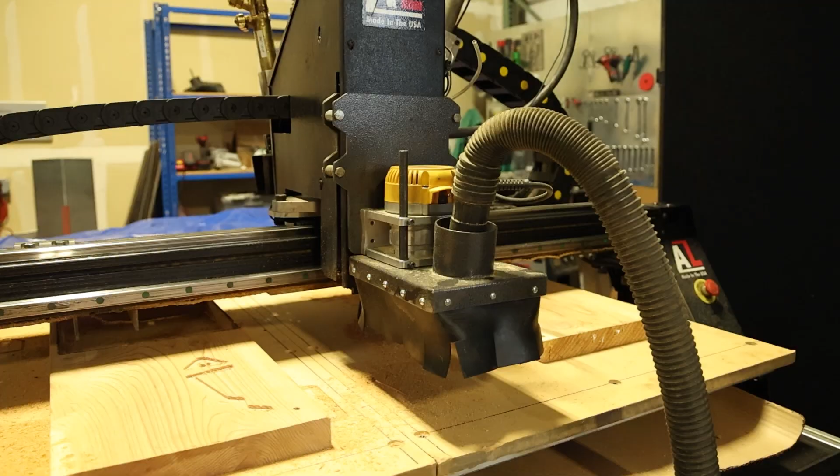Hey, I'm Dakota with the Arclight Dynamics tech team, and today I'm going to show you how to use the router on the Flashcut CNC control system.

When you get your router kit, there's a few things you're going to need to do to set that up. The first thing you're going to need to do is pull off the torch mount, and you're going to need to put on the router mount.

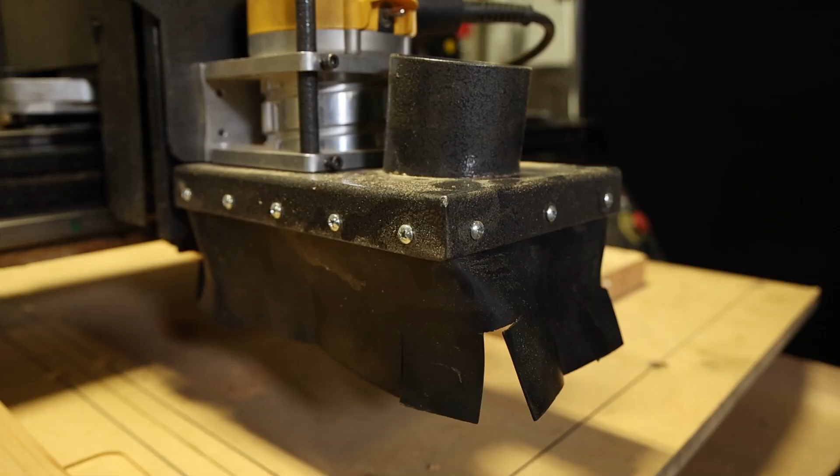Then you'll slide on your shroud to be able to get that over and contain the dust and shavings from the routing operation. We'll also need to set up our sacrificial plane on our router support bars, and our router support bars will sit on these towers here.

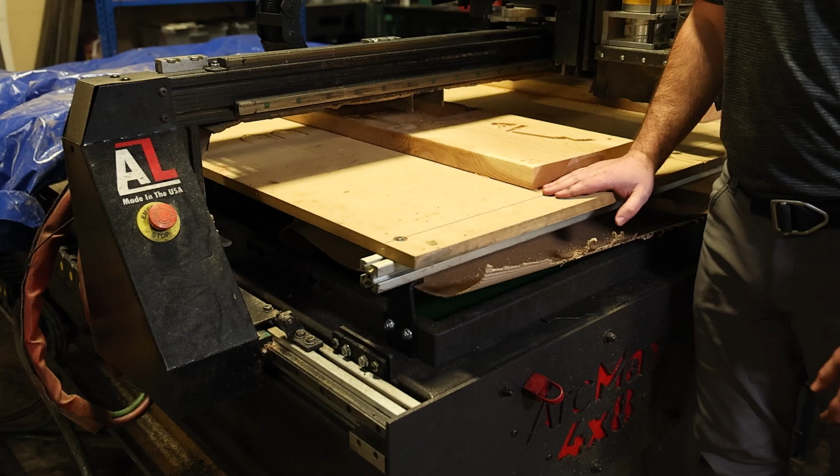From here, you can screw your plate, or whatever you're routing, in this case wood, onto your sacrificial plane. I also have some cardboard set inside the bottom of the pan here to make sure I can catch all that dust and debris that we're getting from routing. That way it doesn't go into the water when we decide to go back to plasma cutting.

We're going to start by going into Flashcut 10. Once we're in Flashcut 10, we're going to go to CNC. We're going to connect the controller. And after we got the controller connected, we're going to home the table.

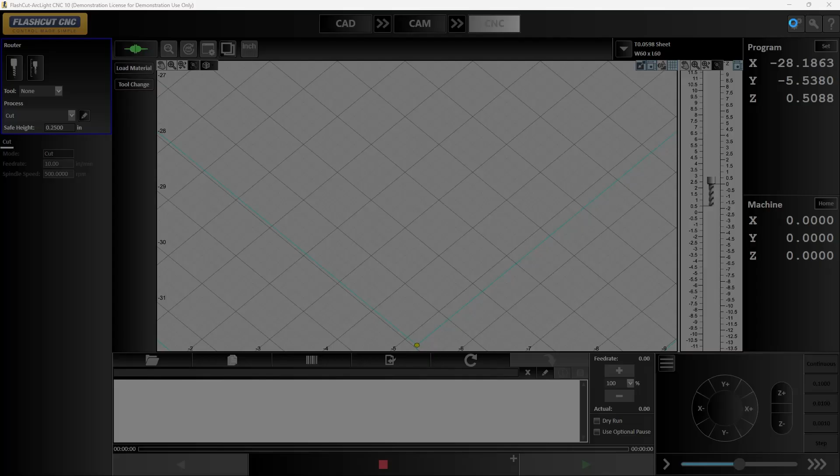We'll also want to set up our setup file. So we'll need to go to the configuration icon, hit load, and select our router setup file.

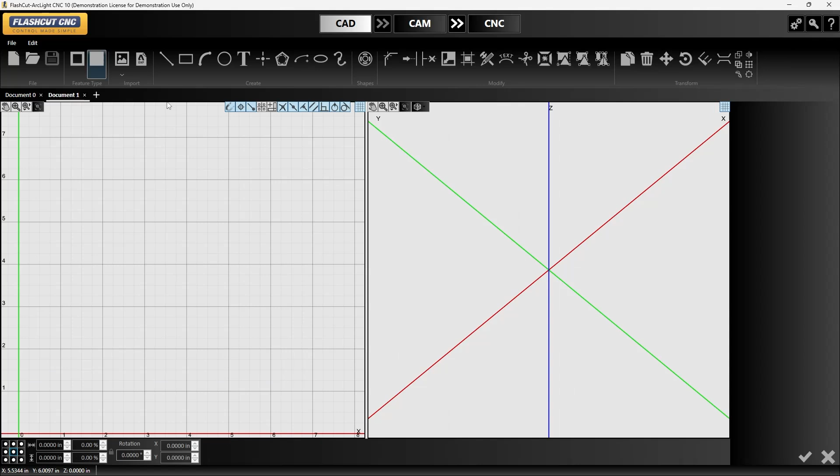From here we can go into CAD. In CAD, we'll go to File, New, and this is going to be a 3D part. Then from here, we'll bring in an Arclight shield, and we'll turn that image into a vector.

So we'll import a silhouette, find our Arclight shield. We'll start tracing a toolpath, or a vector, on this particular drawing. We can approve that.

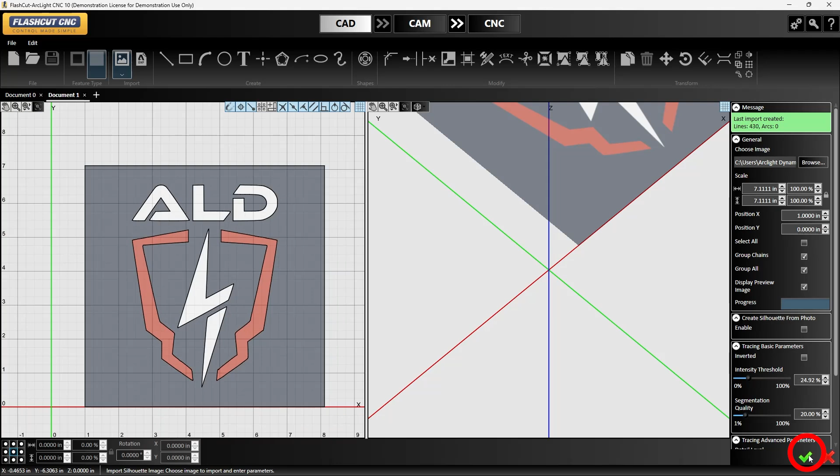Then we'll see the 3D dimensions for this drawing. Now for here, I want the outside to be the thickness of the material that I'm routing. So I have 1.5 inch wood on here right now. I'm going to set this just slightly thicker than 1.5 inch. That way when I go to route this, I get through the material all the way. So instead of saying 1.5 inch, I'm going to say 1.6 inches.

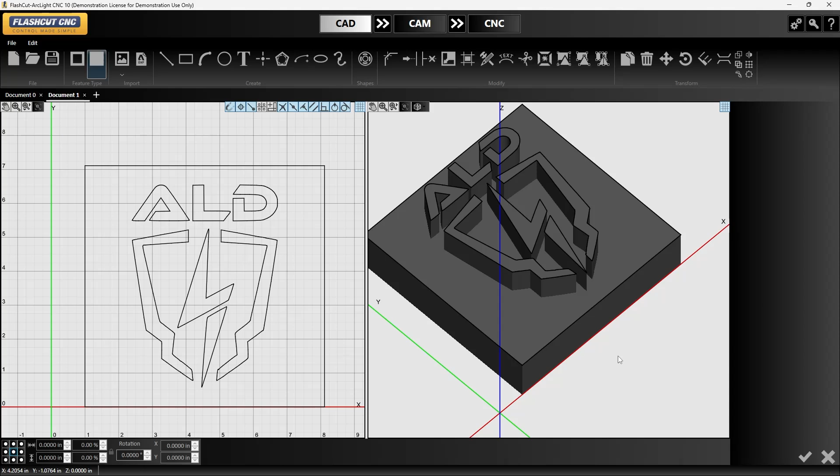This takes the whole drawing and moves this up. So now I need to take the inside of the drawing and move it down because I want to inset that into this part. I can hold Control and do multiple selection.

Then I can tell it the offset for this interior routing part. And I want this to be 1/2 inch into the material. So we'll go -0.5. Now we can see that that's inset in there.

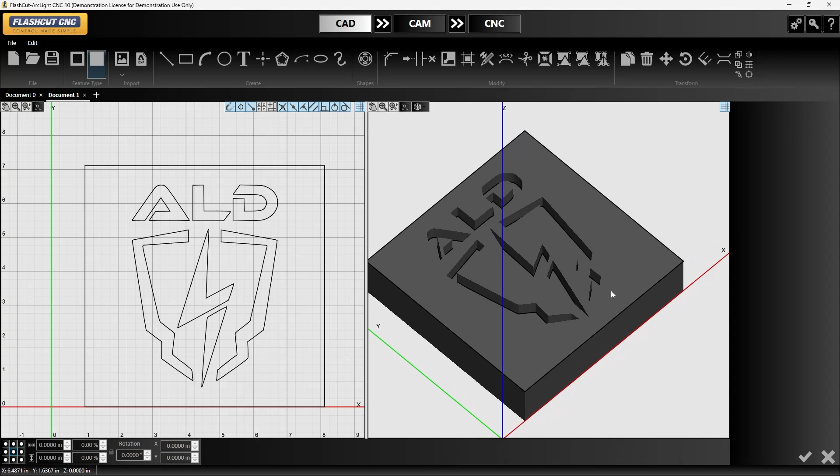And I'm happy with this operation so far, so I can send this over into CAM to start telling it how it's going to route this operation.

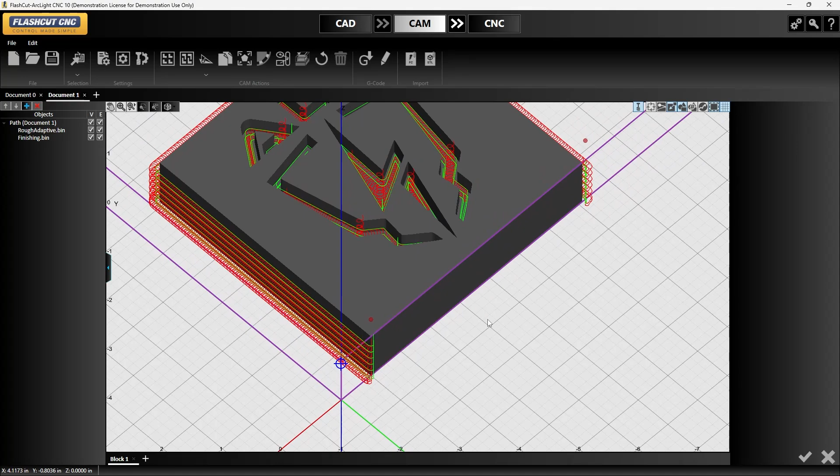So for getting this set up, it's going to immediately start throwing a toolpath on there based off of whatever settings we have already loaded in, but we'll need to go in and fine tune this.

So we'll go to the project settings first, and we'll set our default cutting fab head as the router. We'll approve that. Then we'll go into the material settings, and we need to set this based off of the area we're working in. So we want to make sure our project fits within this area.

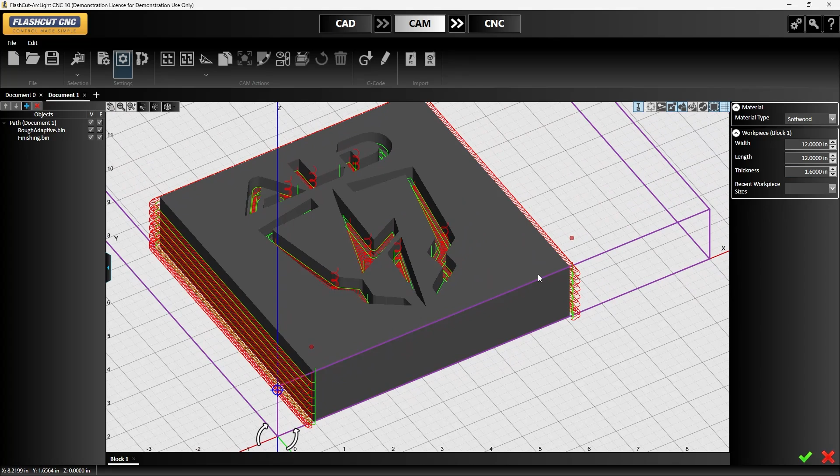So I'm going to set this up because this is a 7x7 part. I'm going to set this up in a 12x12 area, and the thickness being 1.6 inches, since that's what I've set for the material for this job as well.

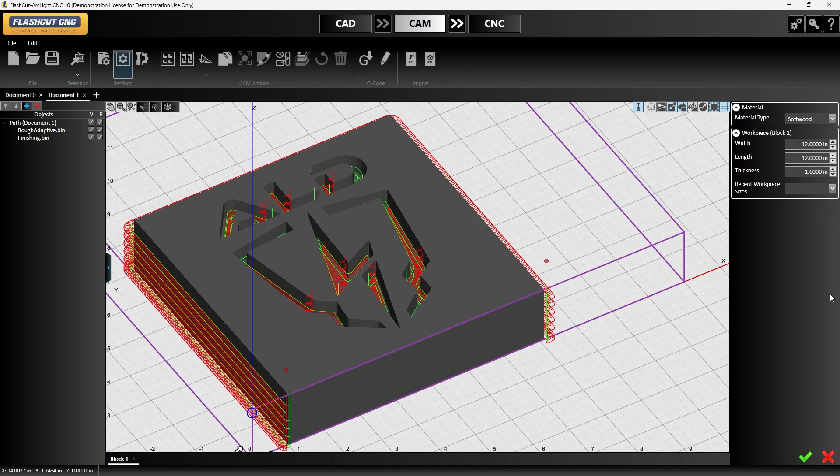Now I need to start setting up my toolpath for this operation. So on the left side here under Objects, we're going to see our operations here. And we can start going in and kind of fine-tuning this.

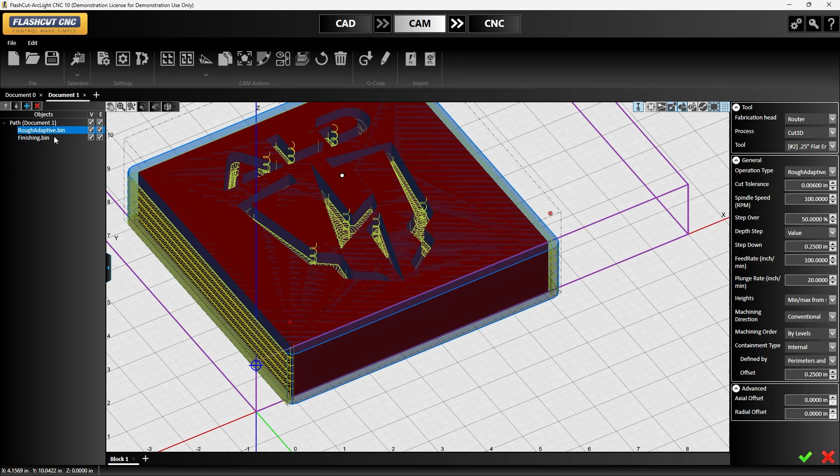So right now I have a rough adaptive and a finishing. If I want to go in and add an operation, I can also go in and add operations at the top here by clicking on this plus. And I can add operations like parallel, flatlands, finishing, pencil, whatever kind of operation I want to set in here.

Then from there, I can go in and fine tune that process specifically which tool I want to run, and the tolerances, feeds, and step down that I want to run for the specific operation.

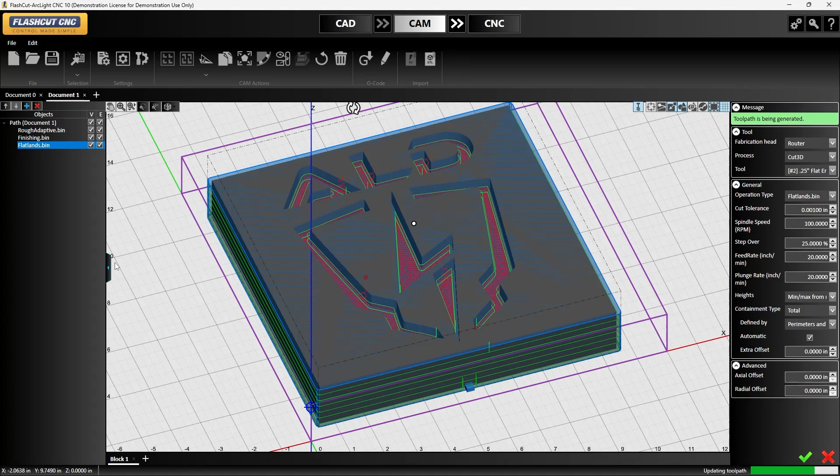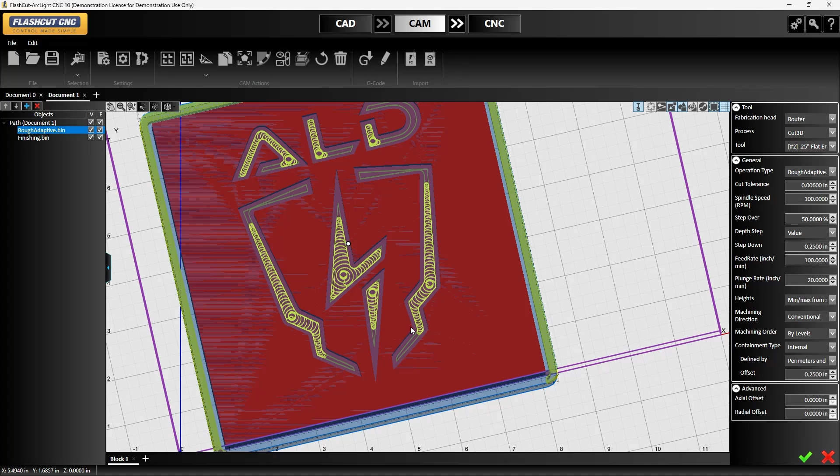I can also choose whether I want to execute this operation or just view it. I can see my operation here, and I can see that I'm not quite fitting my toolpath on the inside of this part. It tells me that our kerf width is too big to fit in some of these areas. This can be easily overcome by going into CAD and oversizing the inside of the part.

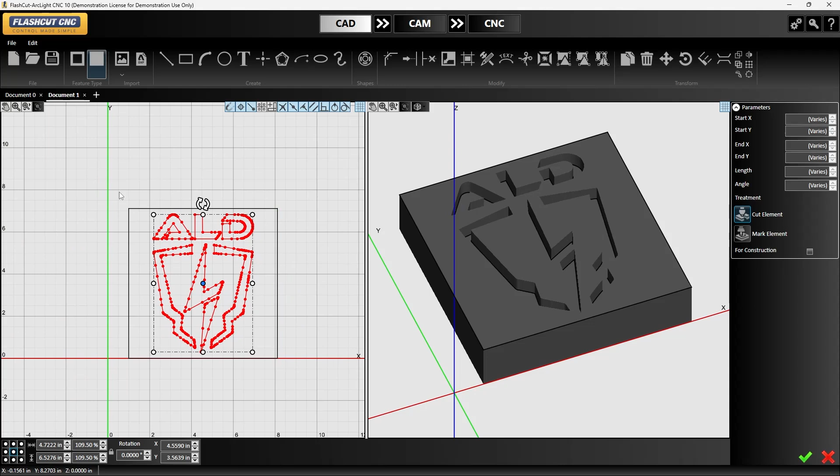I'm going to break this whole part apart by ungrouping all, and expand the inside of this operation. I'm also going to make this whole part bigger, setting it as a 10-inch by 10-inch part.

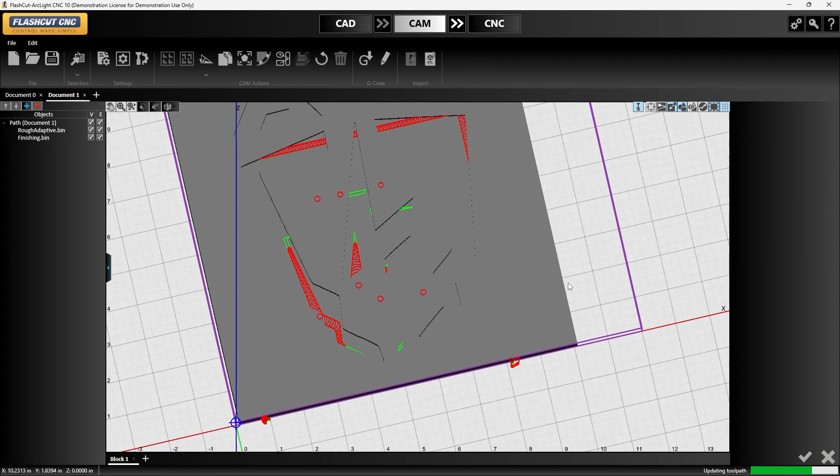We can go back into CAM and look at the toolpath it's throwing on this part. From here I can see that we're routing out the whole part, and getting the toolpath to fit in all the areas we need it to. We're going to move our part into place too, making sure our path fits around the whole outside of the part, within the material area we've told it to.

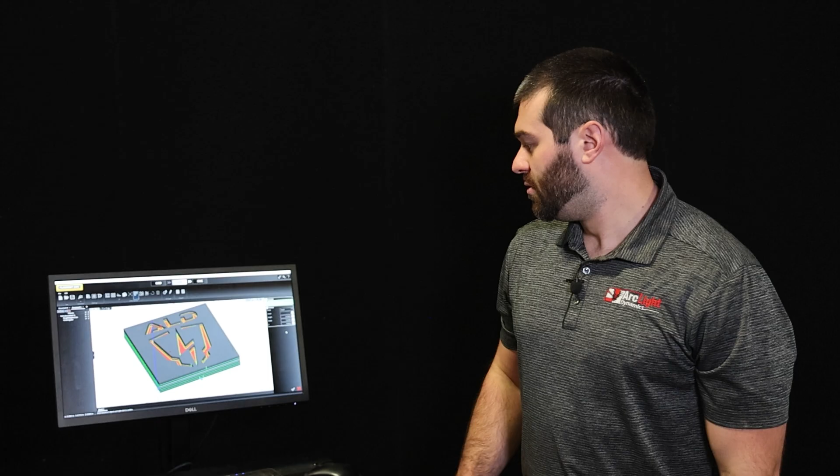Now I can see that I have a finishing pass on the outside edge and a rough adaptive and finishing pass on the inside edge. I'll need to set some holding tabs to make sure our part doesn't fall out when we start this. When adding holding tabs, we want to make sure we can secure our part within the material we're routing, so we don't lose control of it when we finish the operation.

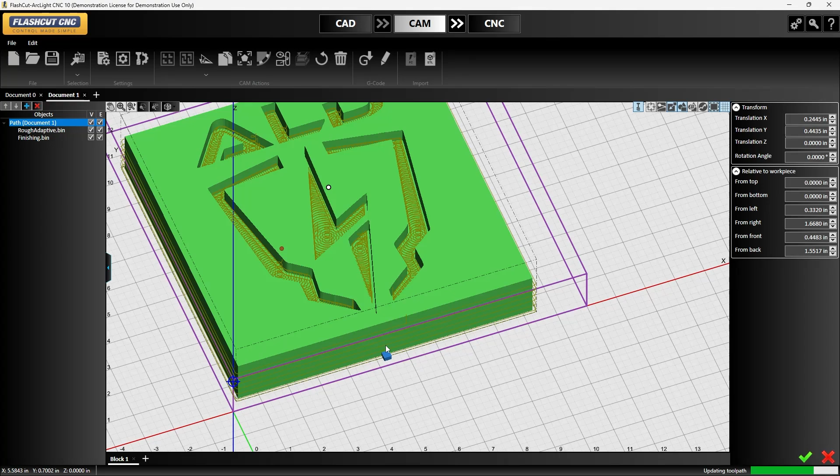So I'm going to go to the Add Tab section, right-click, and approve the part. I'll tell it the number of tabs I want. Then we'll have our two holding tabs set at the bottom of our part and at the top of our part.

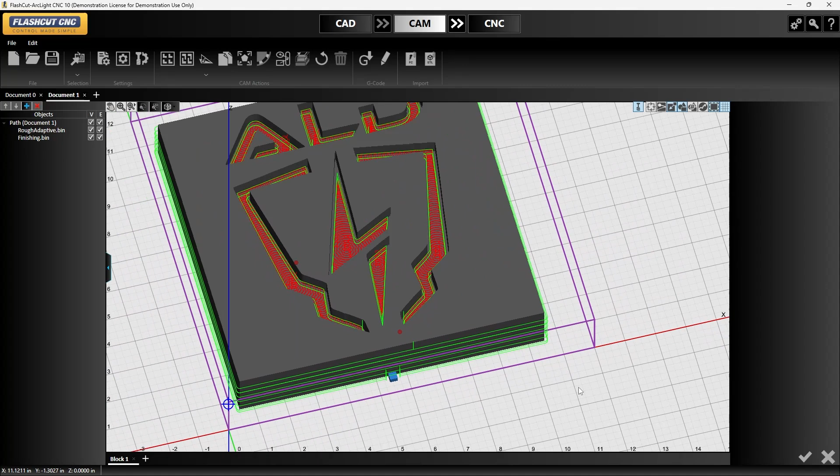To make sure this part is going to route out correctly, I'm going to go to the simulation button and simulate this operation, making sure it's going to finish correctly.

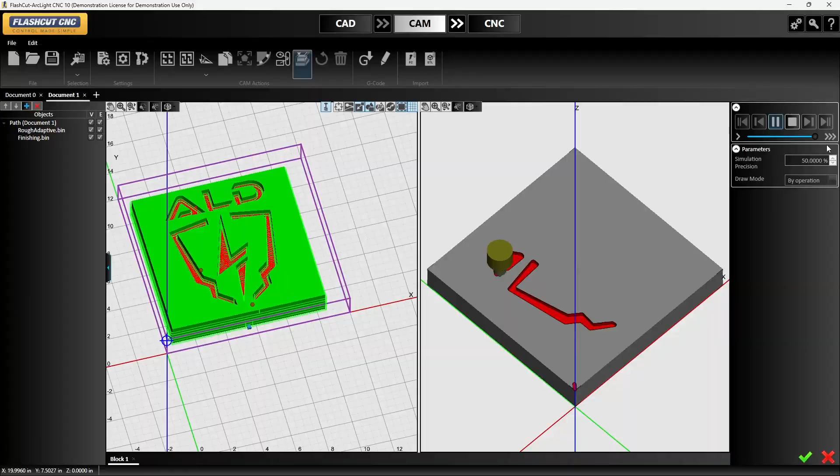I'm going to go in and check my operations now, starting with my rough adaptive. In here I have my depth, my step down, and my feed rate, and then my plunge rate in between depths, as well as heights for this operation. I can adjust this feed rate and step down based on the thickness and type of material I'm routing, but right now 1/4 inch depth at 100 inches per minute is perfect for this operation, so we're going to approve that.

Then we'll go to our finishing pass and check those values as well, making sure we have the same tool and the same values as what we're setting for our rough operation. This looks good too, so we can go ahead and approve this.

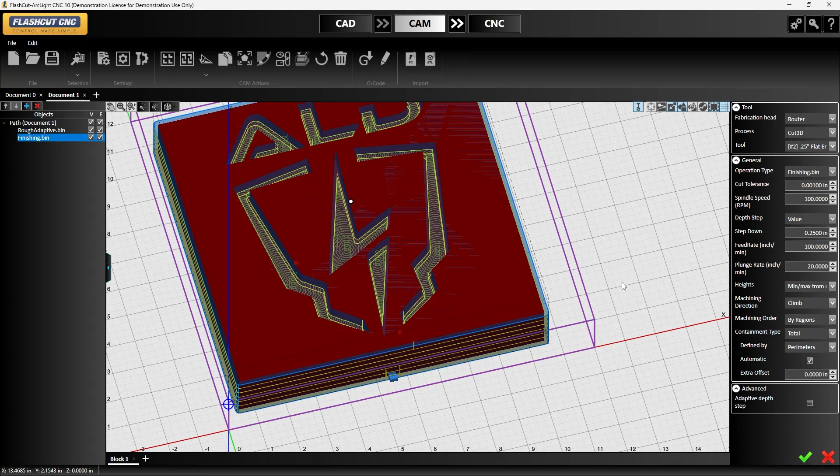Now from here we can run this over into CNC, and we'll go ahead and route this out. We'll start by moving the router over to where we want to route this out, and we'll hold Control to get control of the manual controls.

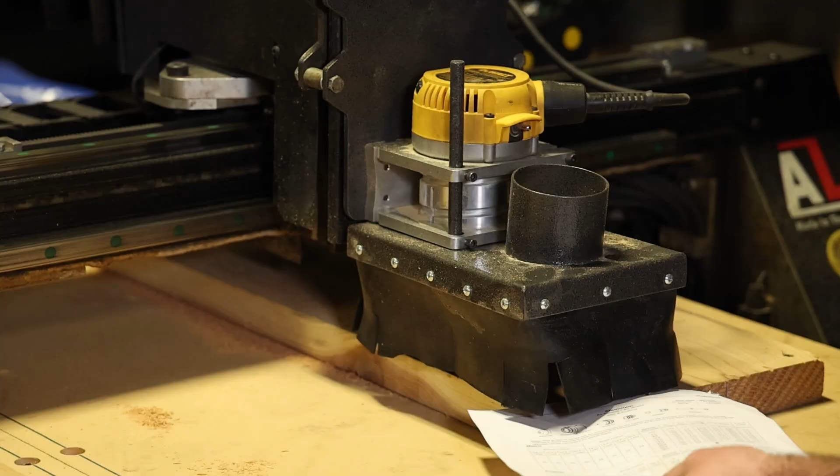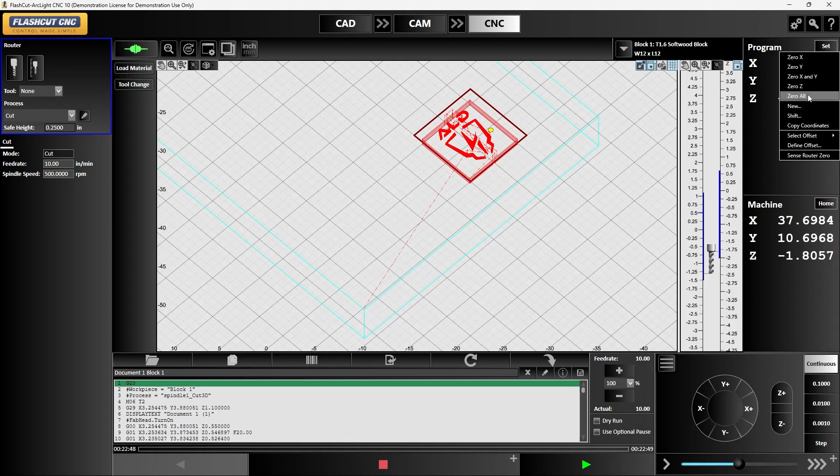We're going to lower the bit down to where it just touches the material. In order to zero the bit, the easiest way I've found is setting a piece of paper under the bit and lowering it down until it causes the paper to be stuck between the bit and the material I'm routing. After I've got the paper stuck there, I can zero out this operation by hitting set and zero all. Then I can raise the bit back up so I can remove the paper.

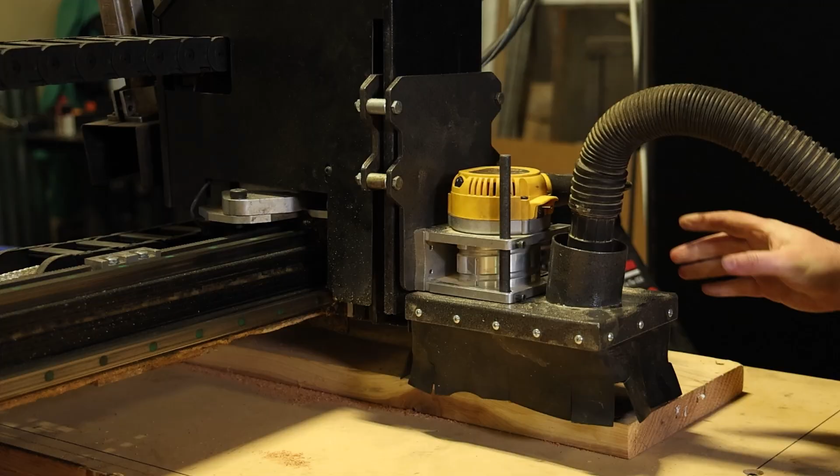Now that I've got this operation ready to run, I'm going to set my dust collection system in place so when I run this I can catch all those shavings. Then we can turn on our dust collection system and hit play.